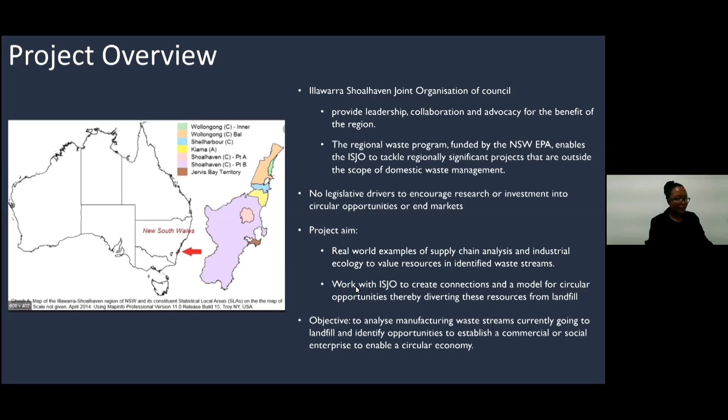So one of the things we needed to understand is the history and background of manufacturing and construction within the Illawarra. There is a strong manufacturing and construction history within this region that dates back to the 60s and prior. Manufacturing in the 60s was huge in Australia, not only in Illawarra, but it employed over 1 million people, and 25% of the GDP, which is the gross domestic product, was contributed through the manufacturing industry.

Whereas in construction, there is a tree, I understand, called the red gold or the red cedar, and it was used in construction and building of ships within the region of Illawarra and Shoalhaven. And that was actually a big market opportunity back in the day until they had to put some legislation around it.

But other than that, specifically in Illawarra and Shoalhaven, this region is the third largest regional economy in New South Wales. Through its activities and support from other businesses, including manufacturing and construction, it contributes about 18.98 billion Australian dollars to the New South Wales state. It has one of the 10 largest cities in Australia, and that's Wollongong, which is also the business and administration area of the region. The workforce is known to have a trade certificate or higher, and manufacturing employs over 10,000 people.

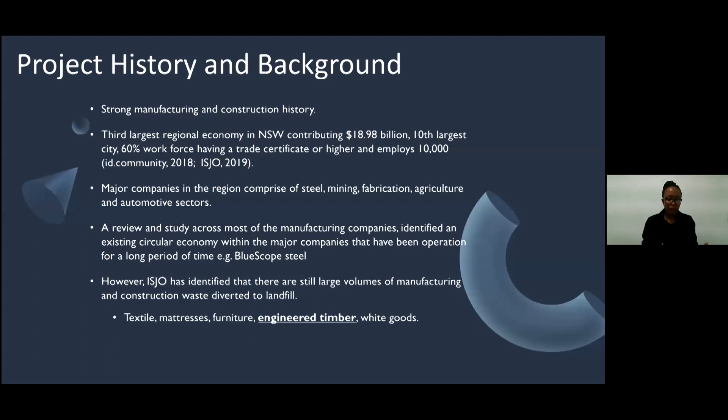However, through different projects and core businesses that ISJO facilitates, they still identified that there are large volumes of manufacturing and construction waste diverted to landfill. For example, textiles, mattresses, furniture, engineered timber, or white goods. And I bring your attention to the engineered timber because that's what this project will talk about. I'll bounce around a bit, but hopefully there'll be a flow towards the end.

So after understanding the history, context and background of this research, we narrowed our umbrella objective into more specific ones, because Illawarra Shoalhaven, being a regional area, is very connected. It's a lot of family business, a lot of people who've worked and known each other for years. So our objectives then concentrated on connecting with local businesses who are keen to reduce their waste costs, identifying material types and volume of waste generated, as well as assessing viable opportunities to reprocess waste following the Ellen MacArthur business model, which is the diagram I have put to the right of the screen.

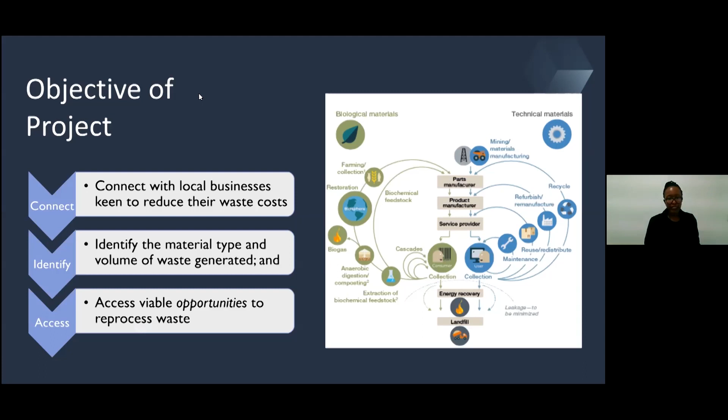So what do I mean by opportunities? If we divert waste from landfill, we extend the shelf life of the government asset, which is the landfill itself. But we also meet the waste hierarchy preferences for dealing with waste, with avoidance as the most preferable and disposal into landfill as the least preferable. So that is a major opportunity for the government in a broader sense.

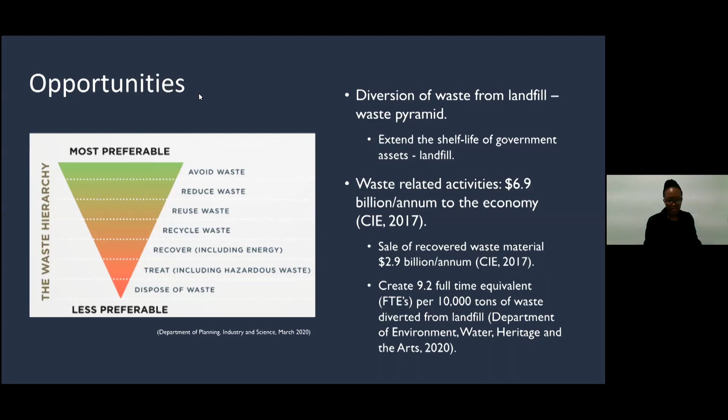And these opportunities then led us to ask, how can we best address our research questions to be able to meet our objectives? And we came up with a few research questions. So again, using that broader and narrower objective, we wanted to understand,

Sorry, I will just have to move my little mouse. I'm seeing so many people on the screen, sorry.

So we then led to the research questions of what are the largest volumes of waste products from local manufacturers, and what opportunities exist from those waste streams that are coming out of the local manufacturers to develop a more circular economy through them, with them, and through their waste product streams. How can ISJO facilitate that waste material flow?

And do we need to create new industries? Do we use the current industries that are in operation? Or what other social enterprises could be established through this? So what would be required to establish this, and how could these materials from the council's bulky waste stream, which is another separate research project, but ties in with our manufacturing, construction, and timber projects, how can this council bulky waste stream feed into these opportunities so that we are practically killing, I think it's one bird with two stones, is the saying.

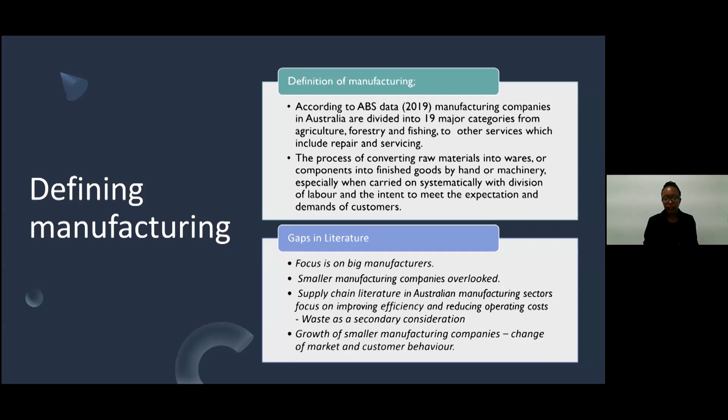So because of that, we realize that these gaps in literature basically focus on bigger manufacturers and construction companies. Smaller manufacturing companies are definitely overlooked. And the supply chain, especially within the Australian manufacturing sectors, focuses on improving efficiency and reducing operation costs. Waste becomes a secondary consideration. And the growth of these smaller manufacturing companies has changed because of this consumer behavior and consumer demand. Studies show that consumers and customers can actually go to small to medium business holders because they can specify and meet those needs easily compared to a larger industry.

So what about manufacturing and construction in Australia? It still follows the traditional manufacturing process of take, make, and dispose. And there is a lot of waste that comes out from that, just as I've explained previously.

So therefore, to address these gaps from the previous slide, this research undertakes a small-scale project in regional New South Wales to identify current waste streams and pathways and opportunities to develop a cradle-to-cradle business model within the current supply chain.

And this was also influenced by, one, the rate of innovation in manufacturing and construction being low, but having larger, small and medium enterprises push out more product. And also there has been implementation of the Chinese National Sword policy, or the China ban, and change in consumer behavior, which has led to shifts in marketplace, market demand and competition. So competition is now being seen from a more green or sustainability lens, rather than that quick push of materials out to the customer.

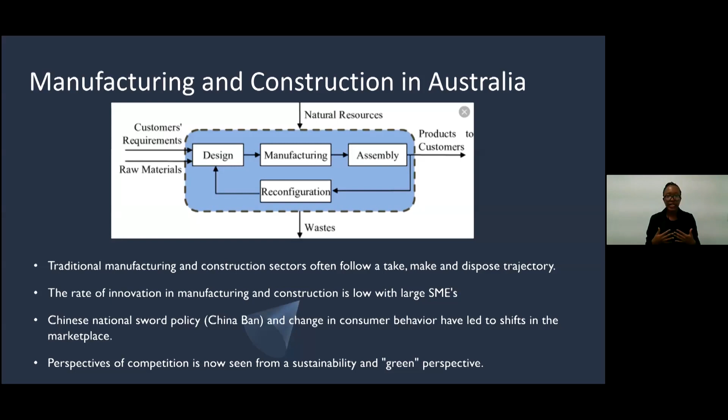So why engineered timber? The reason this research ended up following engineered timber is because, to achieve the objectives we set out for the project, we initially reviewed manufacturing companies currently operating in Australia, specifically the Illawarra and Shoalhaven region, and the different value flows these companies are bringing into the region. The initial review determined the expected output in terms of waste volume, which was identified to be waste engineered timber.

Further analysis traced the larger volumes of waste engineered timber to end up in landfill or being burned for energy use. The research project identified alternative pathways by which waste engineered timber, particularly medium density fibreboard, which is MDF, and particle board, which is PB, I'll be using those two abbreviations quite a lot, can be reintroduced as a resource at the end of life.

So because of the amount of engineered timber that was being pushed out, we decided to focus on those two. Those were the two major ones that kept being sent to landfill or being taken as waste to fuel.

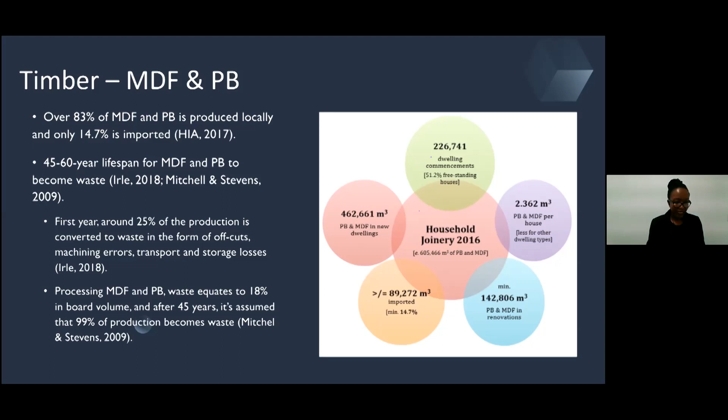So, in terms of the data that we've gotten across Australia and in other regions, with the consumption and the trends of MDF and particle boards being on the rise over the past quarter century, there is need for circular economy alternatives and opportunities.

So over 200 million meters cubed of MDF and particle board was produced across the world, according to the FAO, in 2017, with over 80% of the production used in construction and furniture sectors. The Furniture Industry Research Association was able to back up this data.

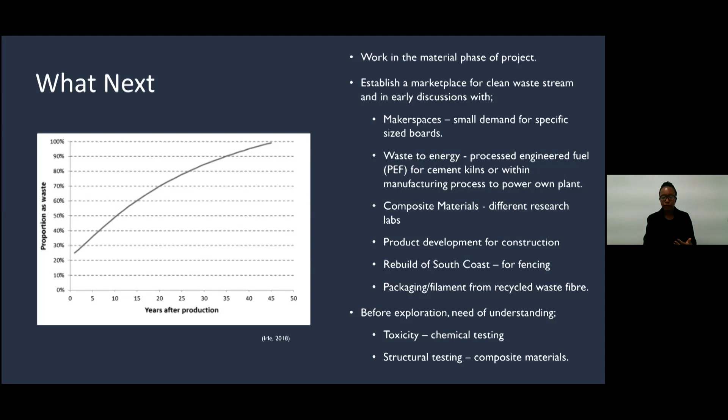The E0 rating is basically the amount of formaldehyde equal to a certain percentage. It's a standard set by the Australian government that regulates timber and furniture products. So you can have a certain rating which is not harmful; it doesn't release a lot of harmful toxins as you process it. But we needed to understand how that toxicity level will look once we start putting it into different things, and do more structural testing in terms of composite materials, which brought us to this bit.

So, scenarios. Once we understand that, one is we can actually convert particleboard back into particleboard. Currently major suppliers are doing this across the country, and they confirmed using 20% of waste particleboard back into new particleboard.

Onshore, currently, they're only collecting from their clients using strict guidelines for ease of collection and transport. And that's in the Greater Sydney region. We are yet to know of any suppliers doing that within the Illawarra region.

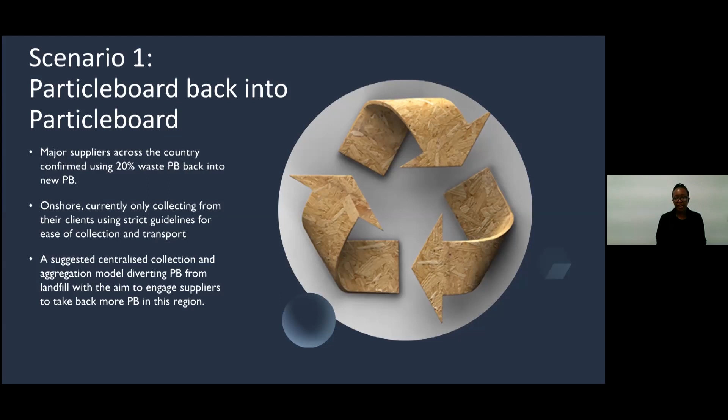So we suggested a business model for a centralized collection and aggregation system where we can divert particle board from landfill, with the aim of engaging these suppliers who are feeding into this region to take back more of the particle board.

A second scenario of a business model we discussed is converting the medium density fibreboard back into fiber. There is a UK company that is currently working on a technology that can take in waste MDF and convert it into MDF fiber. Through some email exchanges, we were able to understand that towards the end of the year, they will be launching a plant and they'll be able to upscale and sell their patents to people who are interested in that. So one of those business models could capture this.

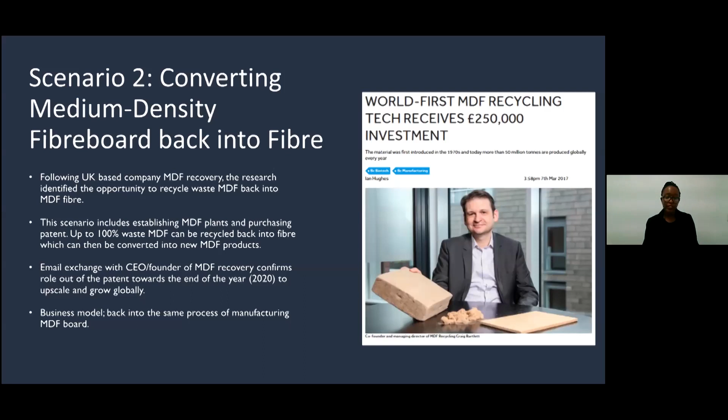The last scenario that I would skim through today: interviews and discussions with experts, both in academia and business, have identified a mechanical process of enabling waste MDF and particle board or sawdust based on grinding MDF and particle board into a composite material in a 60-40 ratio. So 60% being waste MDF or particle board and 40% being a different type of material. So it could be glass, it could be plastic, it could be textile.

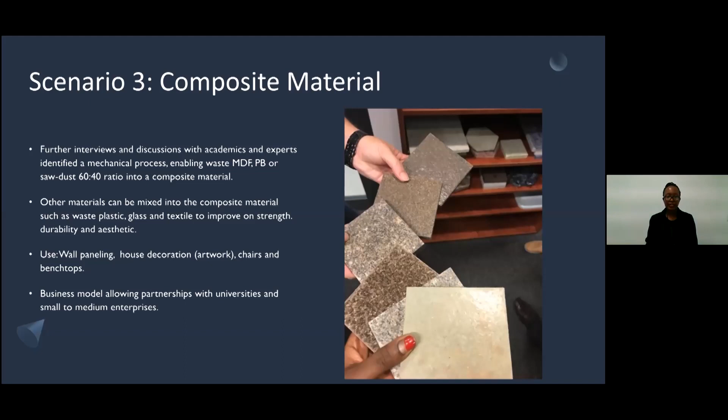And these are just some samples that you can use in wall paneling or house decoration, chairs or bench tops, which then allowed us to think of a business model which can allow partnerships between universities and small to medium enterprises to scale this as an option of diverting MDF and particle board from landfill.

The role of government in establishing local circular economy is currently lacking in most of the literature that we went through and in most of the laws that are being passed. So policy implications such as procurement of recycled materials is actually not there. And also having those unanswered scientific questions about formaldehyde toxicity in waste MDF is also a pending challenge before we can implement any of those scenarios, because it requires the mechanical change of the product.

Tyranny of distance was one of the biggest challenges we had from suppliers and the cabinet makers or kitchen joineries. And also because there's competition between suppliers, there's limited information that is being shared. Waste recycling not being a part of cabinet makers' or kitchen joineries' core business area also seemed to present a challenge because they understand, but they would not prioritize waste recycling in their business. So they do other things, and this comes secondary.